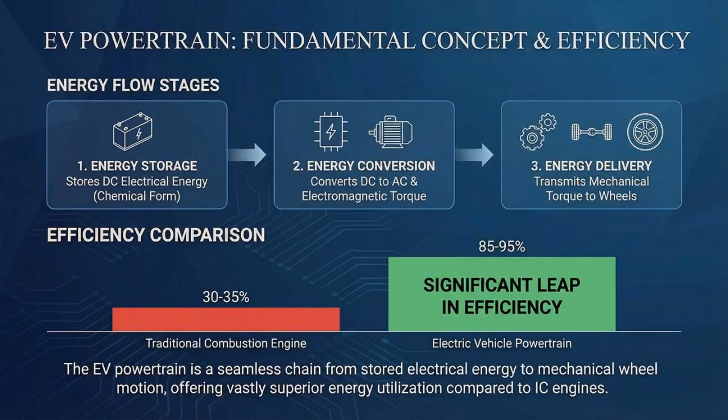The advantages of EV systems over traditional IC engine systems are: EVs are able to achieve instant torque, high efficiency, and silent operation. In an EV, there is no need for combustion cycles, turbochargers, cooling jackets, or exhaust systems. The EV powertrain is simpler, cleaner, and more efficient than IC engine systems.

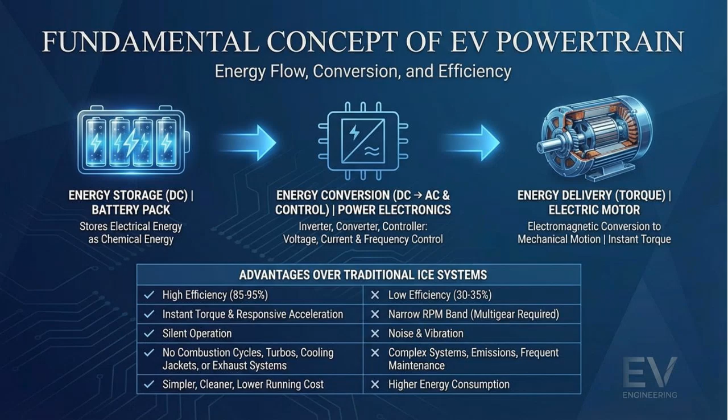Now let's enter the first major component, the battery pack. The battery is the heart of an EV. It stores electrical energy in the form of chemical energy. Lithium-ion batteries are most commonly used because they offer high energy density, long cycle life, and relatively lower weight.

The battery pack includes the cells, which are the basic chemical energy units; the modules, which are a group of cells arranged electrically and mechanically; the pack, which includes multiple modules with cooling plates, casing, sensors; and a battery management system, which we call BMS.

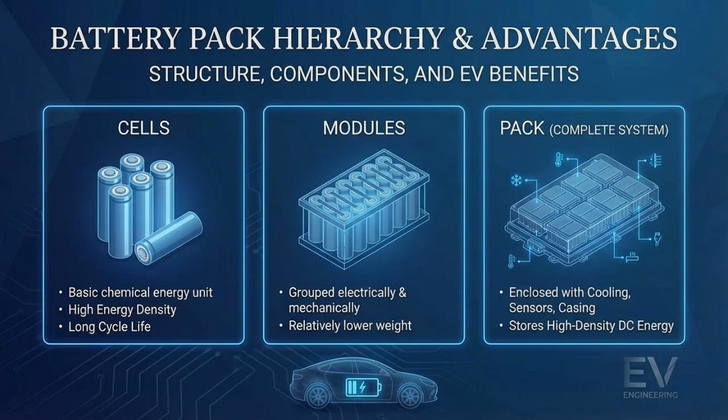The BMS is the brain of the battery system. The BMS plays a critical role. It monitors the voltage, temperature, and current of every cell. It performs cell balancing, protects the battery from overcharge, over-discharge, overheating, and even predicts remaining charge and life of the battery. Without the BMS, a lithium-ion battery would become unsafe.

EV batteries heat up quickly during fast charging and high power acceleration. So EV battery packs also include cooling systems, either air cooling or liquid cooling. Finally, the battery provides a constant DC output, but the load requirements of the motor keep changing. And that is where power electronics step in.

The next important section of the powertrain is the power electronics subsystem. This includes three main components: the DC-DC converter, which converts the high voltage battery supply, for example 300 to 800V, into a lower voltage supply, 12 to 48V, for auxiliary systems like lights, entertainment systems, and sensors.

The onboard charger, OBC, takes the AC power from the charging station and converts it to DC to charge the battery. The inverter is the most critical power electronic component in the EV powertrain.

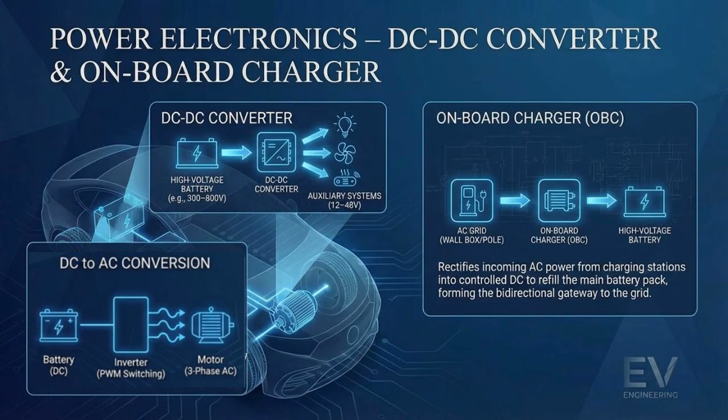It converts DC power from the battery into AC power required by the electric motor, but it does much more than just conversion. It also controls motor speed, motor torque, power delivery, and regenerative braking behavior through pulse width modulation, PWM. The inverter adjusts voltage and frequency to meet the torque and speed requirements of the vehicle.

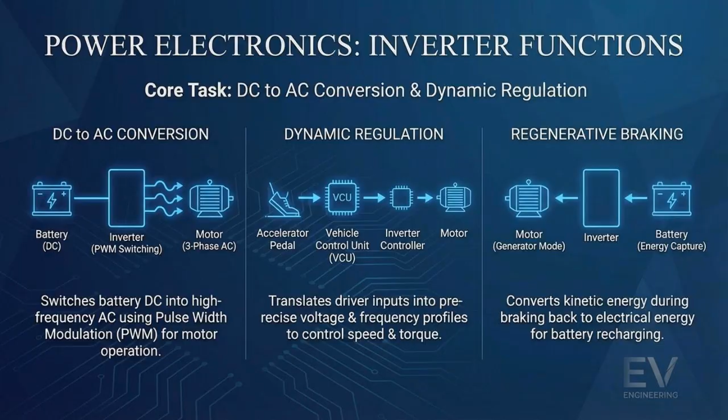The motor controller is sometimes integrated with the inverter. It receives signals from the accelerator pedal, the BMS, and vehicle control unit, and decides how much torque the motor should produce. It additionally optimizes the input parameters to manage efficiency and also protects the components at extreme conditions.

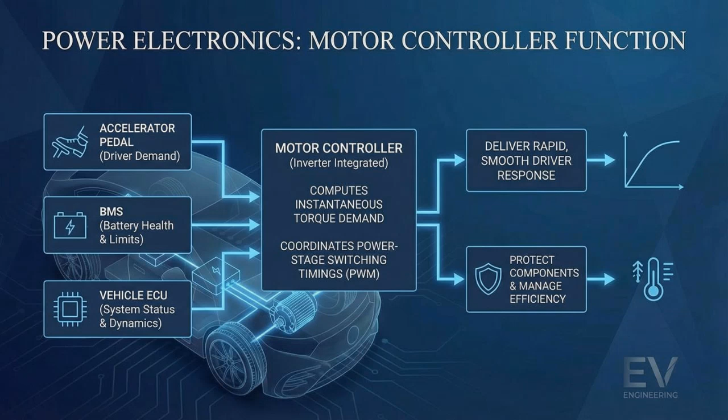Power electronics are the reason EVs are so smooth, responsive, and energy efficient. They manage the entire energy flow with high precision. Now let's come to the component that produces motion, the electric motor.

EVs mainly use three types of motors: permanent magnet synchronous motor (PMSM), induction motor (IM), and switched reluctance motor (SRM). PMSM motors are the most widely used today because they provide high efficiency, high torque density, and excellent speed control. Most modern EVs, including Tesla, Tata, Hyundai, and MG, use permanent magnet synchronous motors.

Induction motors, originally used by Tesla Model S and X, do not require magnets and are robust and reliable, but slightly less efficient compared to PMSM. Switched reluctance motors are cheaper and rugged, but produce torque ripple and noise. They are improving, but not yet mainstream in passenger EVs.

Let's discuss the principle of operation of a motor. The motor operates based on electromagnetic fields. When AC current flows through the stator windings, a rotating magnetic field is generated. This interacts with the rotor, producing torque. Unlike IC engines, which need multiple revolutions to produce power efficiently, electric motors produce high torque even at 0 RPM. This is why EVs accelerate so quickly.

Another unique feature is regenerative braking. During braking, the motor becomes a generator, converting kinetic energy back into electrical energy and charging the battery. This increases the driving range, reduces brake shoe wear, and increases brake shoe life.

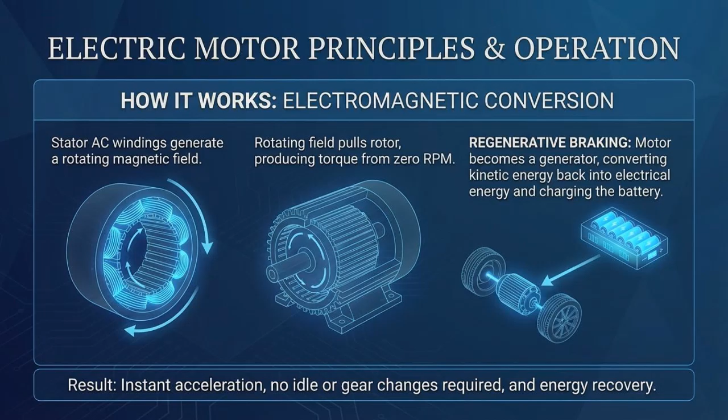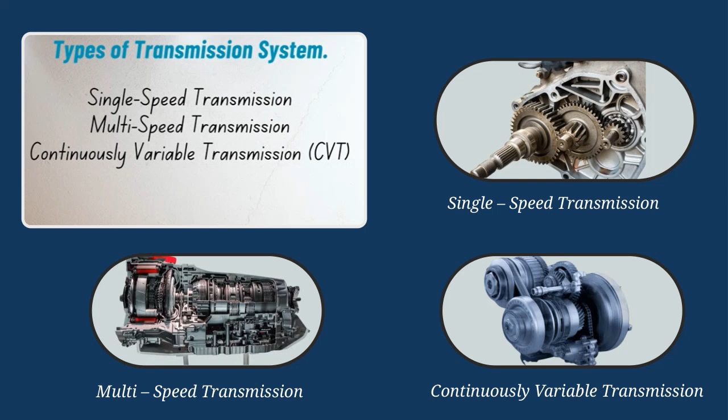Finally, we shall discuss the transmission systems. Transmission systems are basically classified into single-speed transmission, multi-speed transmission, and continuously variable transmission. Single gear transmission system has a fixed gear, and so it has a single gear ratio, and this ratio is carefully designed and optimized for the electric motor performance characteristics.

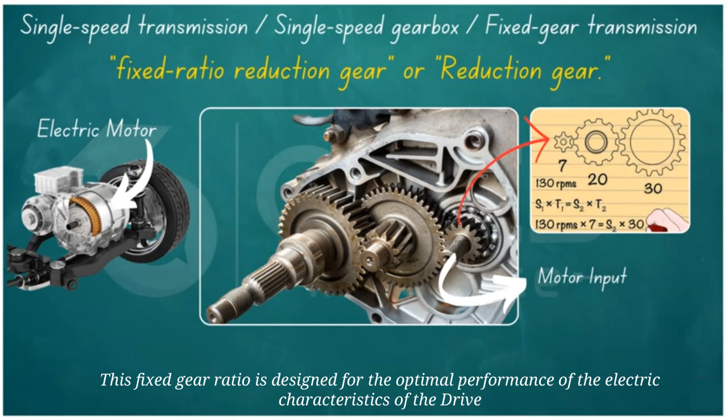In an EV, the motor can generate usable torque across a broad RPM range. That's why most EVs use a single-speed transmission. Additionally, the fixed gear system plays a major role in effective regenerative braking.

The single-speed transmission driveline may include a reduction gearbox, simple gear set, and a differential for front-wheel or rear-wheel drive. A car's differential allows the drive wheels to rotate at different speeds, essential for smooth turning, as the outer wheel travels a greater distance than the inner wheel.

Because torque delivery is immediate and smooth, the transmission system becomes much simpler and lighter. This reduces maintenance and improves reliability.

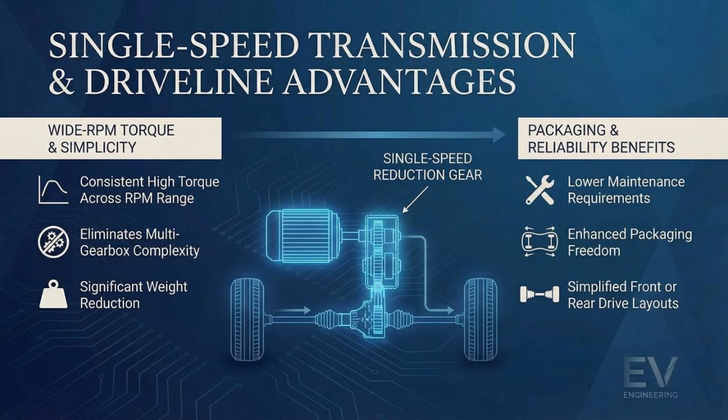Some high-performance EVs use two-speed gearboxes. For example, the Porsche Taycan uses a two-speed transmission on the rear axle to balance acceleration and top speed efficiency. But for most EVs, a single-speed reduction gear is sufficient.

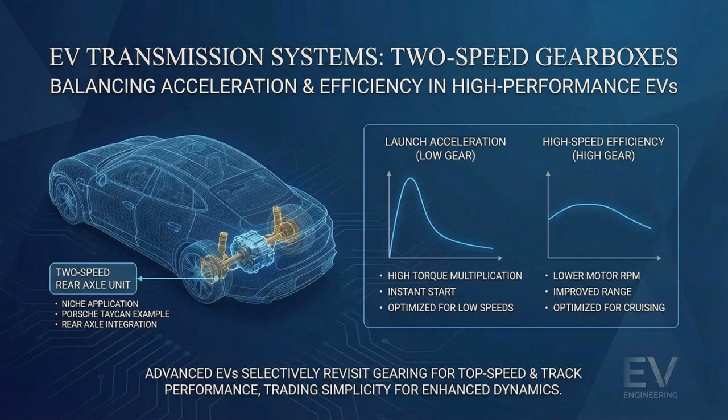Multi-speed transmission system provides the ability to change between several gear ratios. Components of a multi-gear transmission system are the electric motor, multiple gears, and clutches. During multiple gear shifting, clutches help to engage or disengage one gear while selecting another. The principle of a multi-gear system is lower gear ratios provide higher torque and acceleration, while higher gear ratio provides speed and efficiency.

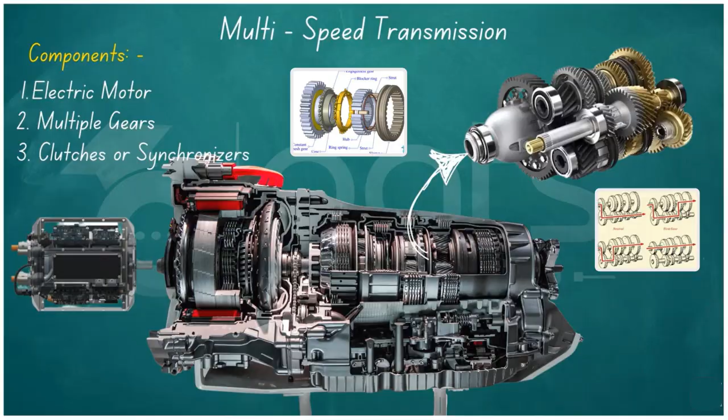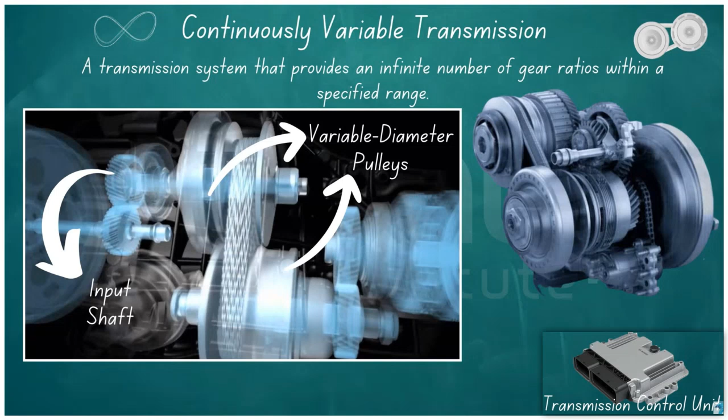CVT provides an infinite number of gear ratios within a specified range. Components of the CVT are the input shaft, the variable diameter pulleys, the metal chain, and the transmission control unit.

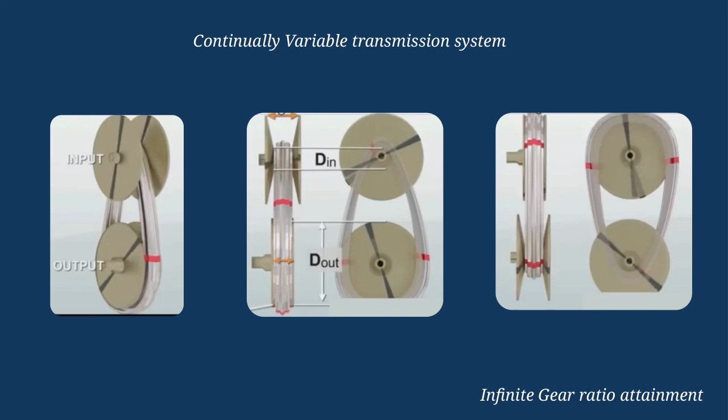We will now see how the variable diameter pulley works to achieve an infinite gear ratio within a specified range. When one pulley increases its diameter relatively, the other pulley reduces its diameter to achieve a transition from one gear ratio to another. In CVT, the transition is continuous and smooth, not discrete and discontinuous as in the case of a multi-gear system.

These are real-time examples of cars that use different types of transmission systems. Chevrolet Bolt EV and Nissan Leaf have a single gear system. Tesla Model S is provided with a multi-gear system, and Toyota Prius Prime and Honda Clarity Electric have CVT technology implemented in them.

Let us quickly summarize the energy flow through the EV powertrain. Electrical energy stored in the battery pack flows to the power electronics. The inverter converts DC into AC and controls motor torque. The electric motor converts electrical energy into mechanical rotational power.

The reduction gearbox and differential transfer torque to the wheels. During braking, the motor works in reverse, sending energy back to the battery through regenerative braking. This entire system results in quiet, efficient, and responsive vehicle motion. The EV powertrains are simpler than combustion vehicles, but rely heavily on electrical and electronic precision.

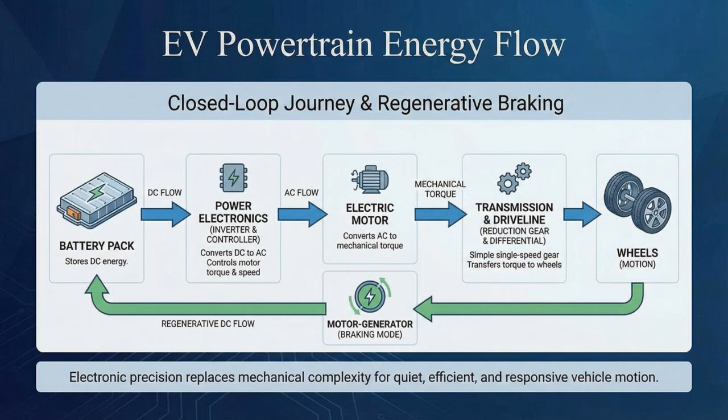Finally, the consolidated pillars of EV technology are electromagnetics, the BMS, power electronic systems, and the simplified driveline. The future challenges are thermal management and control algorithms.

That concludes our first lecture on the fundamental concepts and components of an EV powertrain. You should now have a clear picture of how an EV stores energy, how it converts it, and how it finally produces motion. Understanding this is the first step in mastering EV engineering.